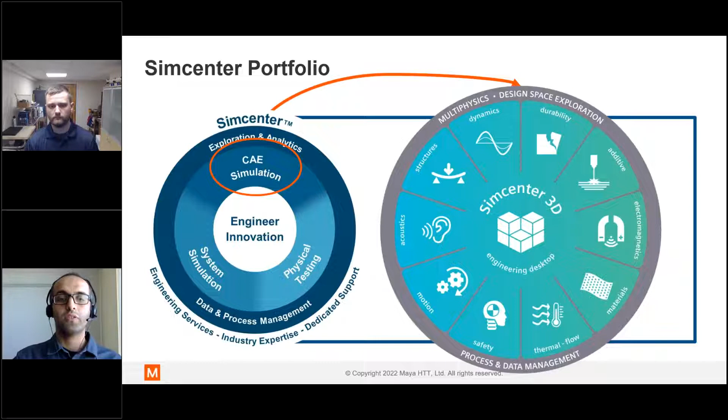Siemens has recognized us as their top North American partner in 2021. We're not just a consulting and system integrator, we also develop software with over 30 modules authored for Siemens, used by millions worldwide. In terms of the solutions we provide, obviously simulation is where we grew up, but over the years we expanded to nearly every other domain within the engineering digital space.

Whether an organization is looking to better design, simulate, manufacture, or optimize operations, we help with deployment of PLM tools, namely Teamcenter, as well as AI, IoT, and machine learning. Our combined engineering, software development, and AI expertise uniquely positions us to move our clients from concept to completion and beyond.

As I mentioned, we are resellers of Siemens tools, and today we're focusing on the Simcenter portfolio, which is the simulation center. All the simulation tools within the Siemens ecosystem are actually part of this portfolio, divided into three broad categories: CAE simulations, covering everything related to 3D simulations, system simulation or model-based system simulation, and physical testing. We do all of that as part of the Simcenter portfolio.

One key thing about Simcenter is that you can combine these different multi-physics capabilities to do multi-scale, multi-physics, multi-domain analysis. It basically allows our customers to accomplish multi-physics simulation in a cost-efficient way. Today we'll go deeper into our CAE simulation capabilities and what they can do. There are lots of tools available for different types of simulations, for dynamics, structures, acoustics — all of that is part of this platform.

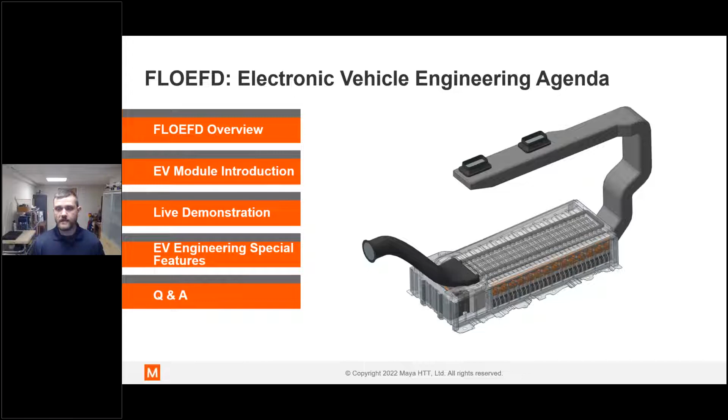Talking about Maya and what we do here at Maya - based on the first poll, you can see that we have a mix of experiences here, and also a bit of difference in methodology of where CFD is implemented in your design process.

I think importantly, what we'll see today is that FLOEFD is a tool that can be used by experienced CFD users, also by design-oriented engineers, and everybody in between, to get useful information that can help you progress your designs to fruition.

Just to mention our hands-on simulate series - this is the last of this series today. Prior to this, we did an introduction to Simcenter FLOEFD where we demoed IGBT cooling, which is certainly applicable to today's module as well, where we focus on electric vehicle systems. Likewise, the next one was on Simcenter FLOEFD for the electronic industry, where we did a detailed thermal analysis of a PCB in FLOEFD - also very applicable to electric vehicle engineering. And finally, our most recent webinar was an overview of HVAC simulation in FLOEFD.

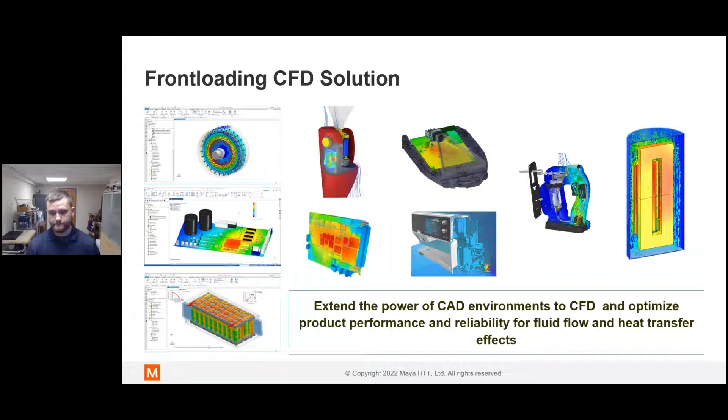So what we'll be doing today is an overview of the FLOEFD electronic vehicle engineering module. We'll do a quick introduction to FLOEFD for those who have never seen it before, or a quick review for those who have. Then we'll introduce the EV module, looking at what we'll be doing hands-on today in the demo, and then go into our live demonstration.

From there, we will go into some of the features that I may not directly look at within the demo, but are very important in the EV module. And we'll finish up with some Q&A.

So what is FLOEFD? Before we jump into our demo - FLOEFD is a front-loading, multi-CAD embedded CFD tool for designers. As I said, it's for designers, but for everyone in between as well. It's fantastic at doing quick simulations, and maybe not even quick simulations, but really design-based simulations in a CAD environment for front-loading of your design.

Front-loading is the concept of performing your simulations earlier in the design cycle to maximize the impact and catch issues before late-stage validation. There are several features that differentiate FLOEFD from other tools on the market, and this slide aims to highlight some of these key features and functionalities.

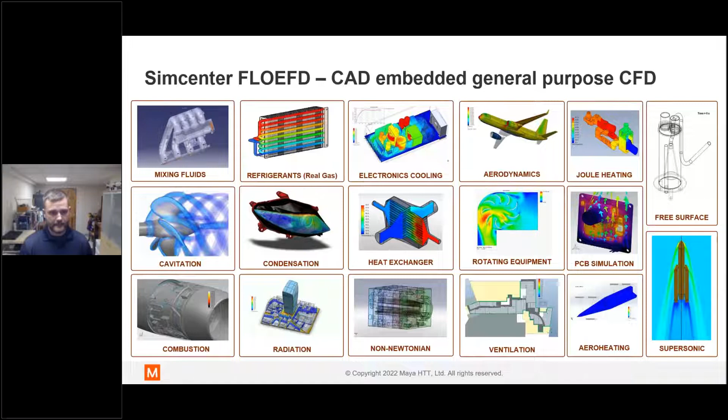FLOEFD is a general purpose tool which can be used in a wide range of flow and heat transfer problems - we'll highlight that a little bit later. There's really not a whole lot FLOEFD can't model in terms of physics, and we'll go into that in a little more detail. This is specifically developed for non-CFD specialists to get fast, accurate results.

The Mesher and Solver have unique proprietary technologies which facilitate the streamlined CAD-embedded analysis approach of this product. The result is a drastic reduction in barrier to entry and overall CFD simulation time. The tool is available in 5 versions to support your CAD workflow. Today we'll be looking at the NX version in this demo, but the process is identical for the other CAD systems.

So what does CAD embedded mean? As I mentioned, it's CAD embedded, and it's in your CAD environment. That's really the best way to put it. Your pre and post processing is directly within your CAD environment. There's a direct link between your geometry so that any changes stay up to date.

You can do direct optimization while changing the geometry. Results are shown on and in context of the CAD models. The native interface is very familiar if you've been using that CAD package for a while. And there's no need to simplify geometry or create fluid volumes in FLOEFD, and we'll take a little bit of a look at that as well later.

The major CAD systems that are available for being embedded for FLOEFD are certainly Siemens NX and Solid Edge. We also support PTC Creo as well as Dassault CATIA. If you don't have any of those, there is a FLOEFD standalone version that you can use as well. And like I said, we'll be today looking at the NX version.

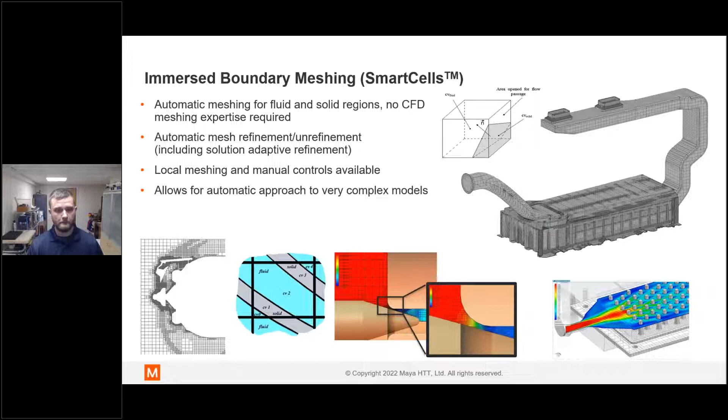As I mentioned previously, there's really not a whole lot that FLOEFD can't do in terms of physics modeling, and this is kind of the broad overview in this slide where you can see it goes from very simple to quite complex physics. So it doesn't matter if you're modeling complex physics, you can do design-based analysis early on in your design for your product or whatever the application is. Even anything from cavitation, supersonic, and even combustion is available, with everything in between, as well as electronics cooling. We'll be looking at joule heating today, things like that.

So one of the major differences between FLOEFD and a traditional CFD workflow is the immersed boundary meshing using what are known as smart cells in FLOEFD.

So typically in a normal CFD workflow, you would have your CAD geometry and you would need to extract a fluid volume. You would then need to mesh it. You'd have to put inflation layers on it if you wanted to be able to model the viscous interaction between the walls and the fluid. So then you have to worry about element quality, and if you have really small features, this can take a lot of time and really produce a very high cell count, and it can take an iterative approach to get a good model with good results.

In FLOEFD, there's no simplification or changes needed to your geometry unless you want to do them for some reason. The fluid volume is automatically extracted, and it's an immersed hexahedral mesh, which makes it very robust and efficient. And all of the refinement can be done automatically if you want it to, based on gradients within the solution.

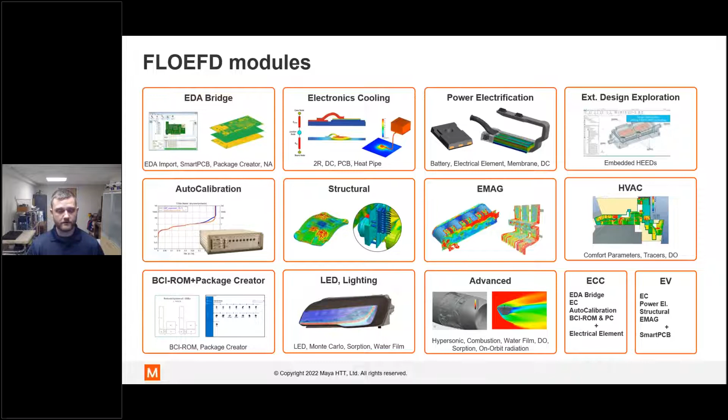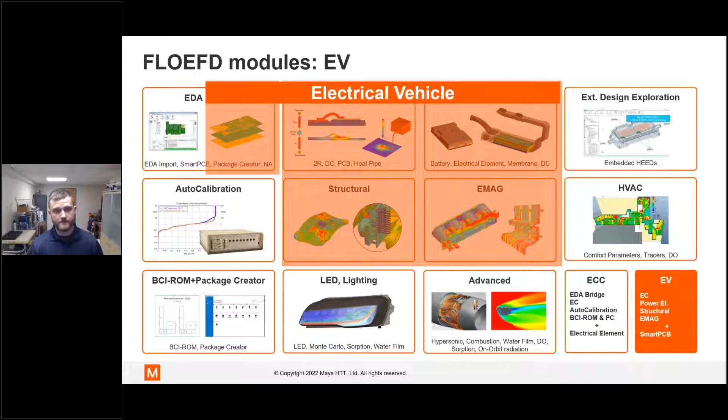Also, with that special technology, the immersed boundary meshing allows some pretty awesome things in terms of efficiency as well. As I said earlier, you don't need to fully resolve the viscous sublayer numerically with a mesh within FLOEFD. It uses wall functions, so FLOEFD can resolve a boundary layer with coarse or really no mesh layers. It can resolve conduction in models within just one cell, and also can resolve flow in channels over just a few cells. And it can also resolve geometry within one cell because it can divide the cell into subdomains.

As a result of this, the user doesn't really need to spend much time simplifying geometry. The user spends less time for meshing, maybe sometimes only half an hour, an hour. It can take that little time for very simple models, or even a lot faster than that. The mesher runs quickly because it's not trying to iteratively mesh. The solver takes less time because there are fewer cells required. And one of the great things is that because of these algorithms, the accuracy is not sacrificed. So this really can be a big jump in productivity.

So looking at FLOEFD modules and how they're applicable today, but first let's go over all these modules really quick. The new Simcenter FLOEFD module comprises various capabilities crucial for comprehensive multiphysics: thermal, electrical, magnetic, structural analysis of e-powertrain

and its components such as batteries, inverters, bus bars, DC links, power modules, and their components such as IGBTs, MOSFETs, and ECUs. These capabilities include joule heating, electromagnetics, low frequency, using EMAG, ECTM, the ECM battery model,

which we'll talk about here a little bit coming up, electrical elements, smart PCBs, so you can bring in your ECAD data and make these reduced order PCB models using resistance networks, or even modeling them explicitly if you would like.

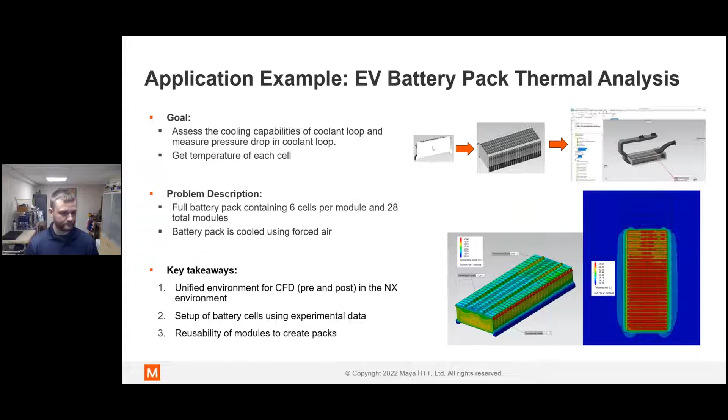Yep, and that's really one of the things we'll look at today, is you'll kind of see some of these things in our demo today as we go through in the live portion where I open up the software and work at it, is kind of how to overcome some of these challenges for yourself.

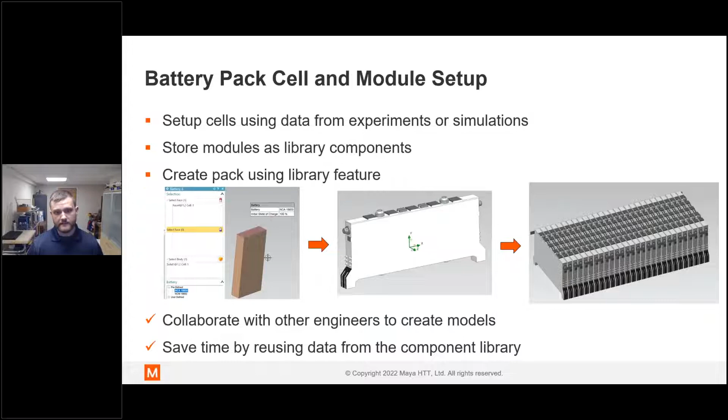Yep, so let's move on. What we'll be looking at today for an example in our demo is an EV battery pack thermal analysis. Certainly this is probably one of the greatest challenges for EVs: these really highly dense energy sources within these vehicles. And as you use them, as you remove their energy very quickly and transfer it to mechanical energy, they're going to produce heat.

So therefore, one of the big challenges here is how to keep them cool when you are discharging them as well as charging them. Because of course we want to charge these systems very quickly. People don't want to stop the EV and wait 5 hours to charge their car. They want to be able to do it like a gas pump. We're not there yet, but we're getting a lot closer.

So the goal is to assess the cooling capabilities of the coolant loop and measure the pressure drop in the coolant loop as well, because we really want to minimize that. Problem description: it's a battery pack, it contains 6 cells per module, and there are 28 total cell modules within this battery pack.

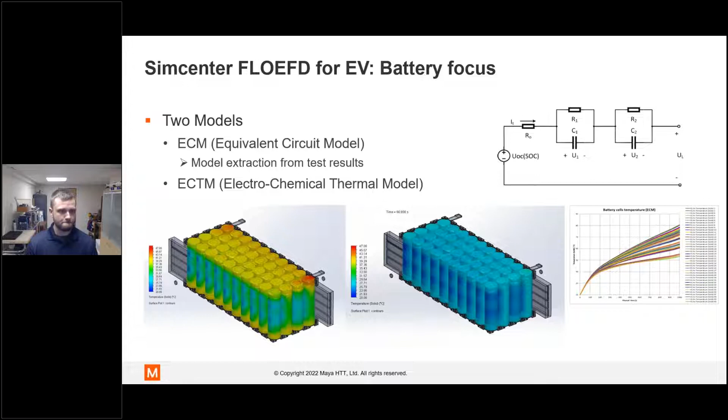Really the key takeaways here is that we're looking at this unified environment that we're describing, so the pre-post environment for CFD within NX, how to set up the battery cells using experimental data that can be extracted using testing, and also the reusability of when you're creating one of these really large assemblies is not needing to define these cells hundreds of times to create the model.

So in that regard, if we look at the battery pack cell and module setup that we'll be doing today, the setup for the cells uses data from experiments or simulations. You store these battery pack modules as a library of components, and then you can create a pack using that library feature. One of the really nice things about this is that you can collaborate with engineers to create these models collaboratively in your engineering system, and save time by reusing that data down the road.

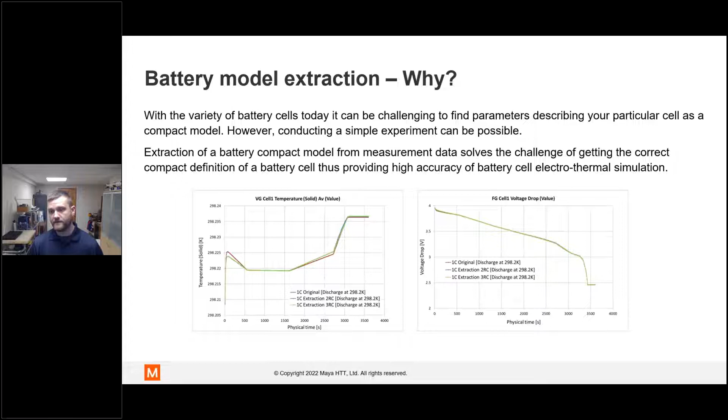Just a little bit more about batteries before we jump into it. The new battery compact model calculates the heat dissipation rate based on the electrical or electrochemical characteristics of the battery cell. The obtained heat dissipation rate is applied to the cell, and the state of charge, voltage, current, and temperature distribution are predicted. This does require a transient analysis because these are all time domain effects.

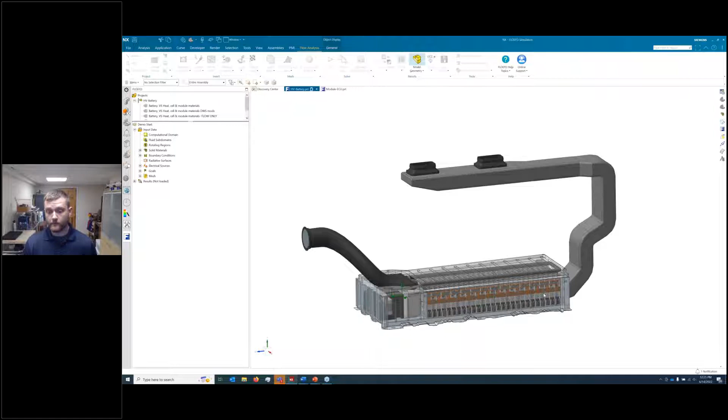Two models are supported for batteries within FloEFD. The first is the ECM model, the equivalent circuit model, in second order and third order — a much more compact and simplified model. But there's also the ECTM model, the electrochemical thermal model, which actually looks at the electrochemical behaviors of the battery cell. Both options are available. The ECM is probably better for a lot of people, especially a design-based approach where if you have battery test data and want to evaluate these things quickly, it's quite useful. But if you want to go more advanced, there is that option as well.

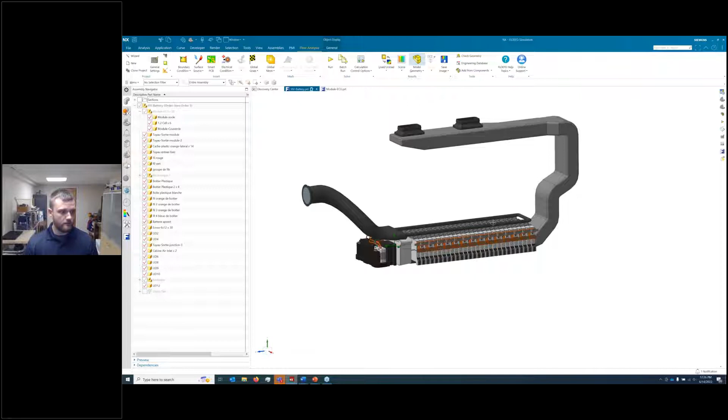So battery model extraction — how does that happen for the ECM model? The experiment consists of charging and discharging the battery in a specific manner while measuring the battery voltage and current. This is also done at a number of constant temperatures. FloEFD comes with two pre-populated models for the 18650 battery. These 18650s are very common and were used early on within the EV industry, especially in early Tesla batteries.

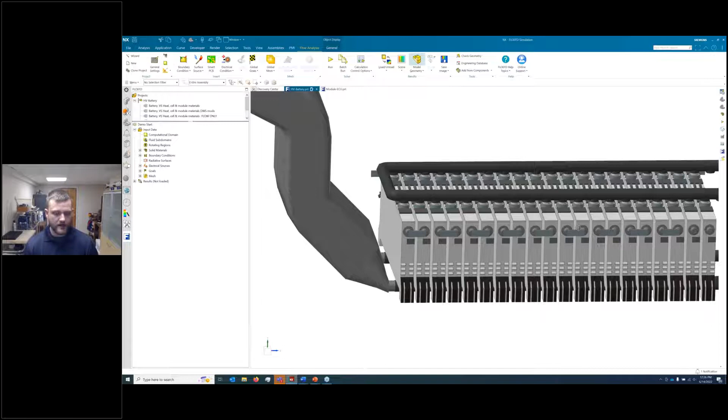So why would you want to do battery model extraction? Not every manufacturer is going to give you the information you need to do a full electrochemical simulation. There are a lot of battery cells out there, so it can be challenging to find the parameters you want and know they are correct. One of the best ways to know things are correct is through testing. So extraction of that battery compact model really ensures you have the proper behavior in your electrothermal simulation.

So we're going to go ahead now and jump into our demo. I'm just going to switch my screens here real quick, and we're going to be going into the NX environment.

All right, so we should be able to see the NX environment here now with our battery pack that is loading up a little bit. You can see what we have here is an enclosure that contains all of our 28 cells — 28 modules that each contain 6 cells.

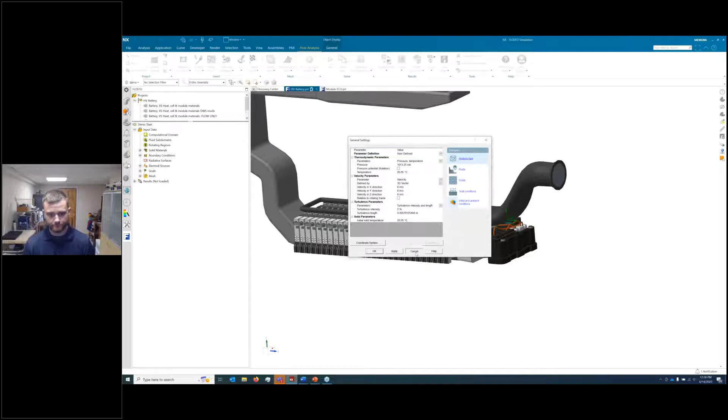From there, I'm going to hide our enclosure here. You can see that we have an inlet where air flows in, which then flows down into this manifold and feeds each module with cold airflow. That cold airflow goes through the battery pack and comes out the top here, and is then discharged out of the vehicle.

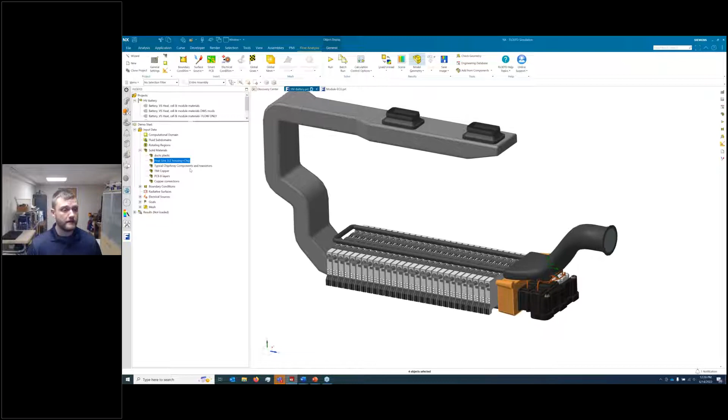So that's what we'll be simulating today. We'll be doing this in the time domain, as I said, and looking at the behavior of this battery pack over time. So before we jump into the nitty gritty here, I did do an overview of this.

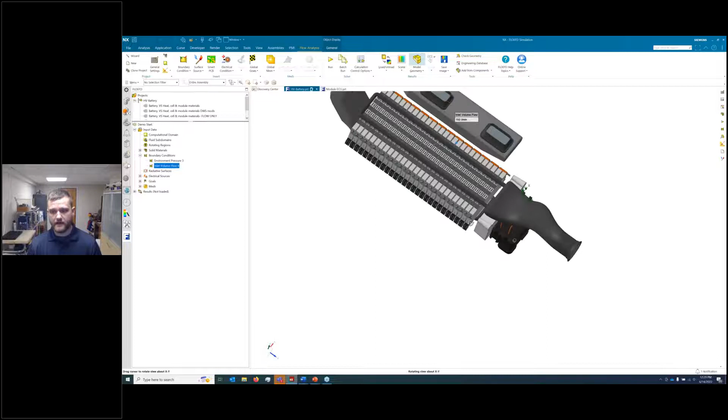You can also see in here one of the important things we'll be looking at is our contacts for each one of these modules. So we have contacts where these batteries are in series to develop around 125 volts at a full charge. One of the first things we really want to show is that modularity.

But even before then, let's just take a quick look at our general settings, and what we would do if we were setting this analysis up from scratch. The first thing we would do is go into our general settings. Today we'll be looking at fluid flow, solid conduction, and we will be including radiation in this analysis. We'll be doing discrete transfer, though there are other models, including Monte Carlo. We do have some rotation in this flow, and this will be a time-dependent analysis.

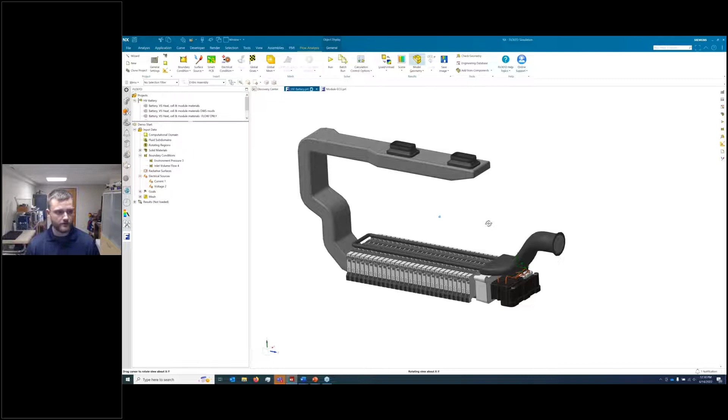The only fluid we're looking at today is air. We're not including humidity, but that could be done as well. Our default solid material is the plastic components. One of the big things within FloEFD is that there is a material hierarchy, so even if you do have overlapping geometry, FloEFD can deal with that fine by saying this material takes first priority, this material takes second priority, and if there are intersections, it will automatically deal with that.

We can do wall conditions as well, default wall conditions. In this case, that'll just be default smooth wall conditions. And certainly we want to set our initial conditions for the analysis. Today it's ambient temperature, ambient pressure, so 20 degrees C, zero velocity. We're not doing anything crazy with our turbulence parameters, and our solid parameter temperature is also at environmental conditions. So this is one of the first things we would set up if we're starting this analysis from scratch.

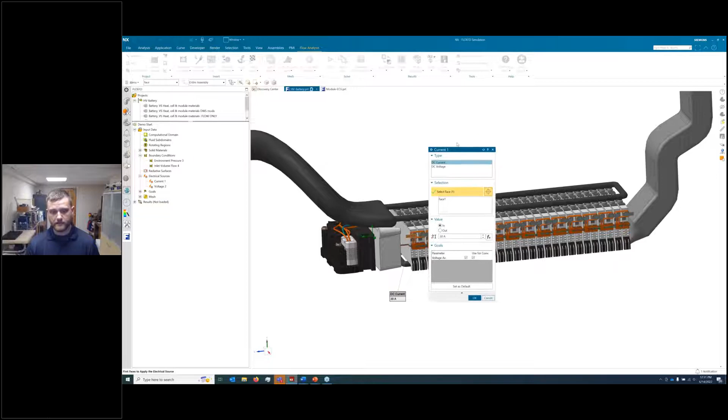The other things we have here as our basic boundary conditions, or excuse me, our solid materials first, is we have our plastic components. This does have a heat sink in this model that's not activated today, so we won't be taking a look at that, but that can all be combined. This includes that chip array that's within there. We do have our thermal interface, copper, and a PCB in there as well. And then our copper connections, which is a big one we'll be looking at today, all these copper connections that are connecting the individual modules.

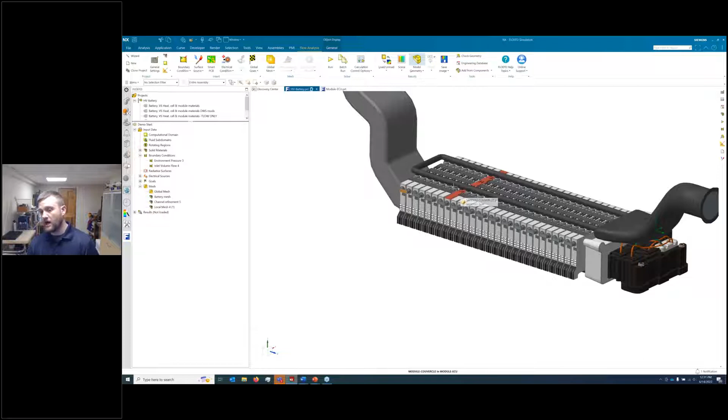For our boundary conditions, we have just very simple environmental pressure on the outlet here, but then we also have inlet volume flow rate at room temperature, which is 150 liters per minute. That'll be constant, won't be changed through the time domain. The thing that'll be changing will be the temperature and voltage in the cells and the charge level in the cells. We're not setting up any particular radiative surfaces, but radiation is activated here, though we're not doing any specific emissivity or absorption parameters on any of these materials.

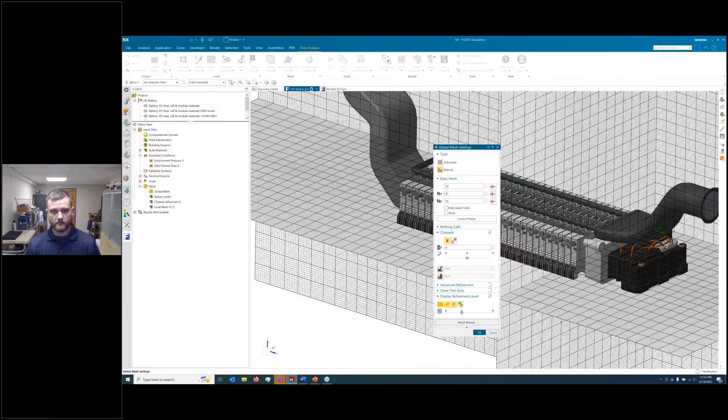The other big thing here is we need to define the contacts and where the ground, the zero voltage location, as well as the current for this analysis, for the electrothermal simulation. So at the first, the positive, final positive connection of the module here, we have a current of 30 amps, and that will remain constant. You can make these transient values as well. If we just open that up, I'll show that real quick. You can see that we have a constant 30 amps here, but we can define that as a function.

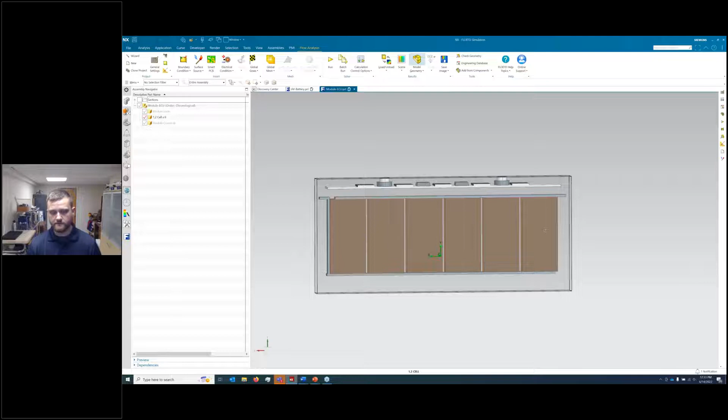More importantly though, too, we can see that this is a charge cycle and not a discharge cycle, so we could do a discharge cycle as well, and you can say in or out. We can make it a function, and we have some goals defined here, and that's a big thing in FloEFD, is we're not really too worried about monitoring numerical residuals in the solution. FloEFD is monitoring that for us, but we are monitoring our values that are important. So we want to make sure that the values, if we were doing a steady state analysis, would converge to a constant value. In this case, they're changing, and FloEFD is automatically selecting the time step as well.

So we have that, and then we have a zero potential location here set at 0 volts.

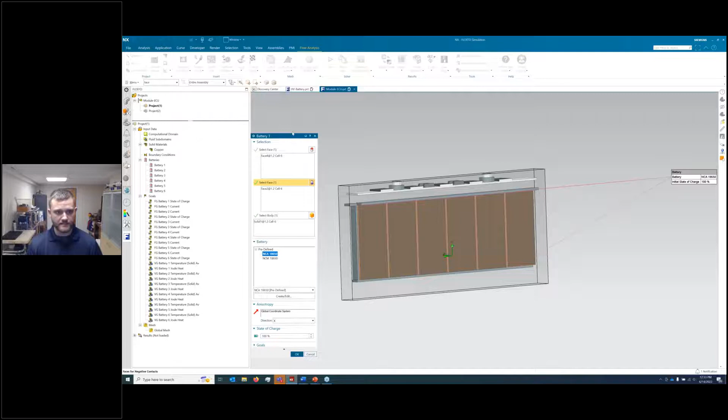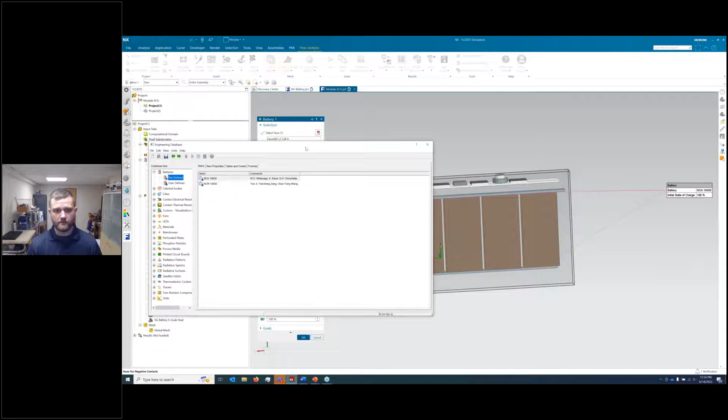As I mentioned, we have our goals. We have some global goals here that are set for the entire simulation. And then we also have our mesh, and we can just take a quick look at our global mesh. We also have some local meshes here. This is a fairly big problem, so we did want to define some local mesh locations, and these can be done in a variety of ways. You can do it in a box or a sphere, or apply it to a body. Those are areas that are very helpful to refine certain locations, channels as well.

But just looking at our global mesh, we'll take a quick look at those parameters. In this case, we're using a little bit of a manual mesh where we have an initial mesh — the dark or thick outline squares are the initial mesh size — and then the smaller squares are for the refinements based on different parameters.

Just a quick bit about that. If you want to know a bit more, we'll go into a little more detail in meshing. I highly recommend some of our previous FLOEFD videos.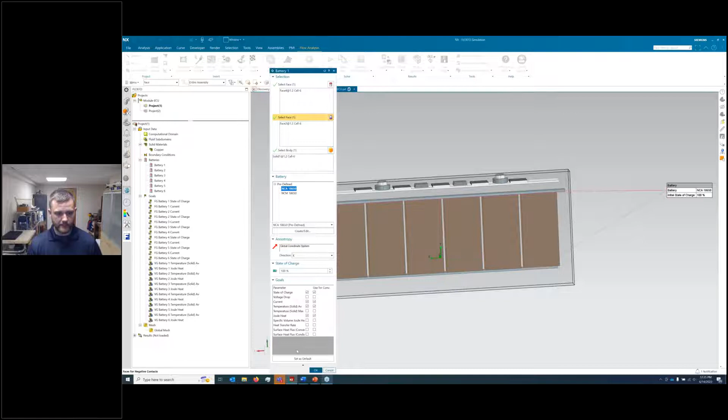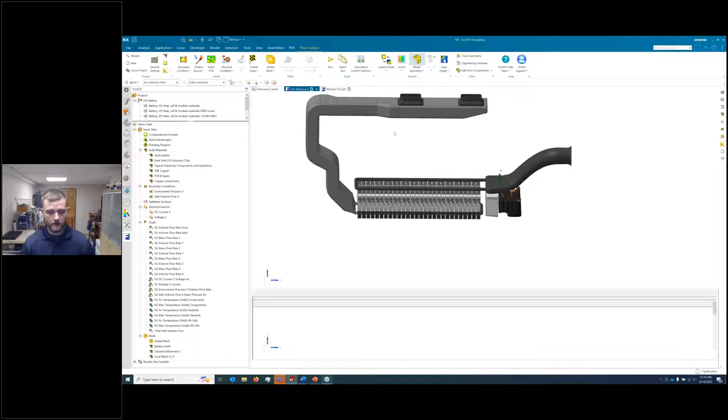One of the big things I mentioned is the modularity of this analysis. As you can see here, we don't have any batteries or cells defined yet. However, we have defined a cell or module in a separate project. I'll show my cells and hide that case. You can see our conductors on these cells, but these are each one of our cells for this analysis. So we don't have to define these hundreds of times to do this.

We have to define it 6 times in one module, so we have battery 1 through 6 here. We also have 2 projects because we're reversing the polarity in these cells, alternating in the packs to develop the voltage. That's just the reason we have 2 different ones here.

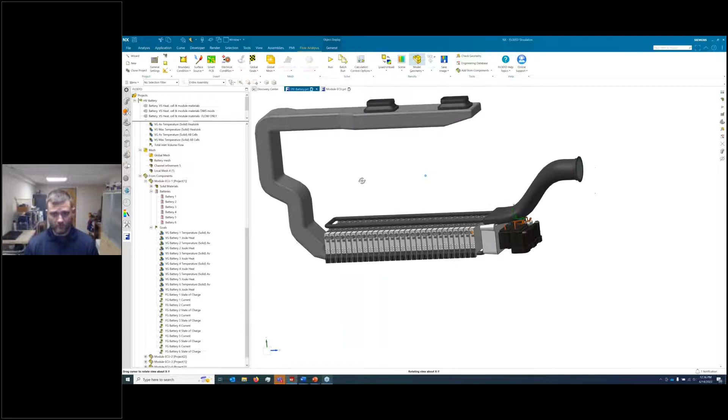So about this first battery, we'll just take a look at the edit definition. We're selecting our positive terminal or positive location, as well as our negative location. We're looking at our battery models here, and this time we're using a predefined 18650 model, which has a specific anode and cathode chemistry. I can show you a little bit of the details here, which are important, where these would be in a library, and you can create your own user-defined ones. In this case, we have this NCA 18650.

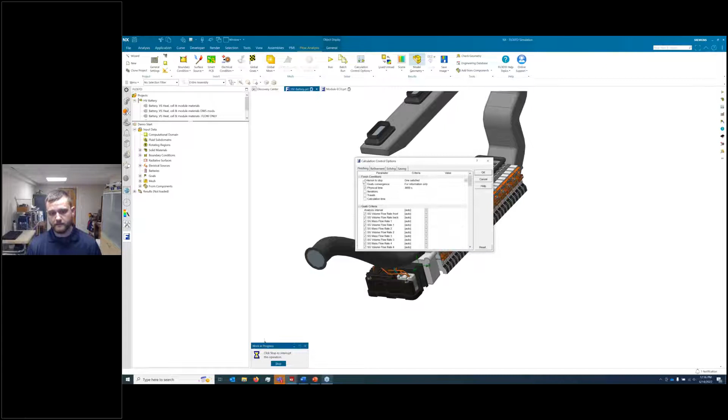We have our item properties, and these R values and C values are all done using a table. Then there's the open circuit formula, which uses those tables for the final model. We can see those curves here for all of those, looking at different temperatures and different states of charge, etc. So that's really our big one. We can see the formula here for the entire mathematical model for the battery. We'll just close that up, but that's the model we use here.

If there is any type of orthotropic properties to the thermal resistance, that can be defined as well. You just need to make sure you set the direction correctly. You can see here that we're doing 100% state of charge.

And we're looking at our goals here. We have a whole set of goals for this entire module as well, so these will be repeated once we set it up. So this is all set, we're gonna close that up.

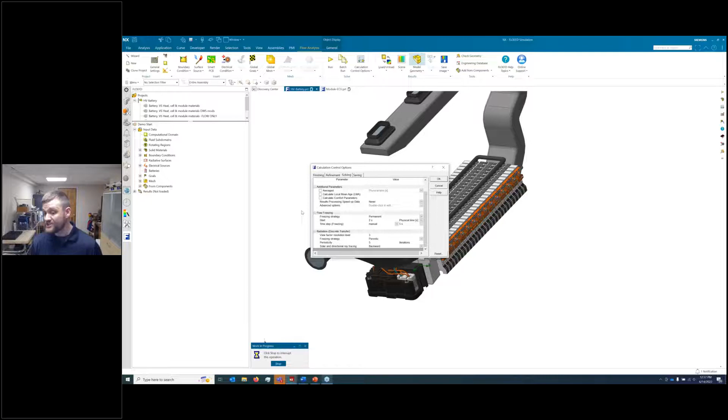Now, though, we have all of these models populated here in our CAD environment, but we want to apply that module CFD model here as well. The way we do that is we go up to add from components, and it's already recognized all these models. We have our 28 modules.

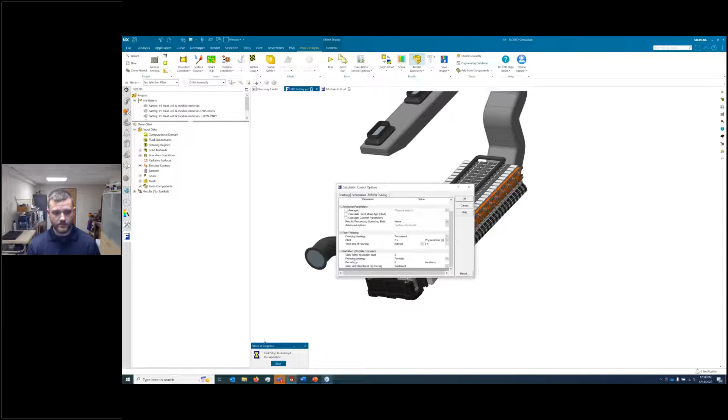For the first one, we would just alternate - the first one we do project 1, second one... I'm not going to do all of these. We do project 2, then we'd alternate project 1, then finally again project 2, and so on until we had all of our modules complete. But I'll add these first 4 so you can see them. We hit the add button and import it - it gives me a nice green check mark that it all went well.

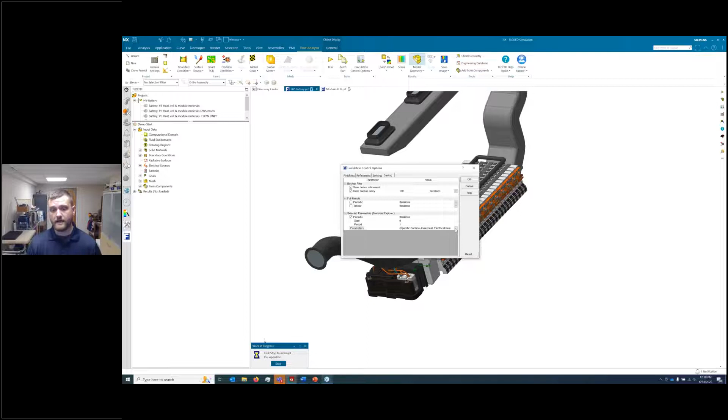You can see we have a from components list here now, with ECU 1, 2, 3, and 4. Each one of these has their own set of batteries, its own set of solid materials as well, and that's all automatically imported.

So this is all of our setup for this project. We don't have to do anything else here in terms of defining the problem setup, other than our calculation control options. In this case, if you were to run this thing all the way out, we've set a physical time for this to complete at 3,600 seconds.

You can also do iterations - you can set what goals you want converged. If it's transient, you've got to be careful about that, because obviously not all goals are going to go to a steady state for a transient analysis, so you have to be careful about that. We could define automatic refinement if we wanted it in a solution - that's not part of this, but that is where that would be. For solving, you can do automatic time steps or manual time steps.

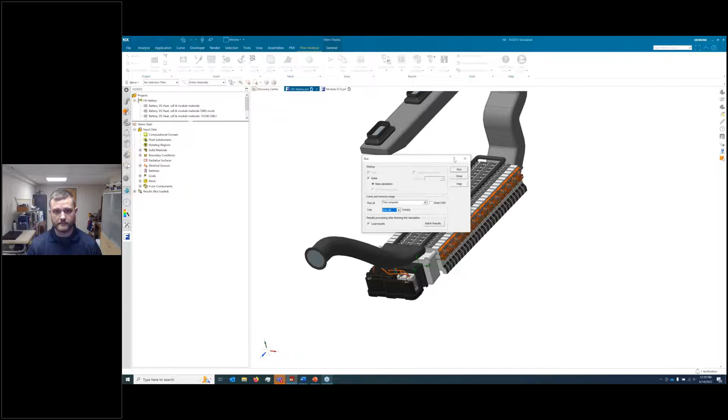In this case, once the solution got going up beyond an initial transient, we stepped up the time step to 0.01 seconds. You can do nested iterations if you would like, if your numerical scheme requires that or is beneficial.

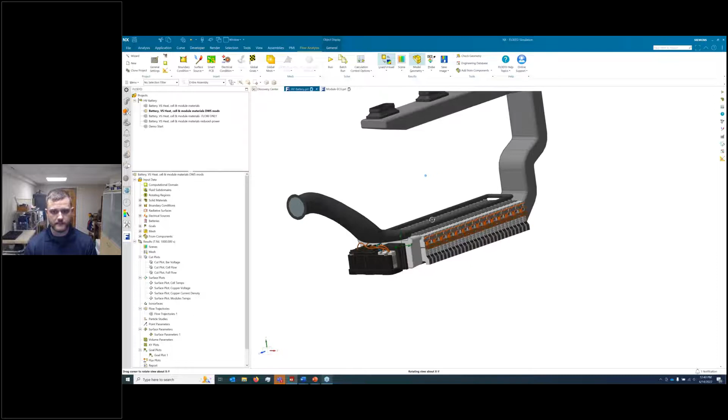Flow freezing is another thing that can be done within FloEFD to speed up a solution. It's used in this analysis where FloEFD will detect areas in the domain where things have reached a steady state and will stop calculating that zone for a period of time. You can do it permanently or periodically, and that dramatically helps speed up the solution, so it's only looking at the transient areas of the domain for each iterative calculation.

And obviously here we have our discrete transfer radiation parameters. One of the things that's cool here, I'll mention before we go into the results, is that you don't have to save full results for a transient simulation.

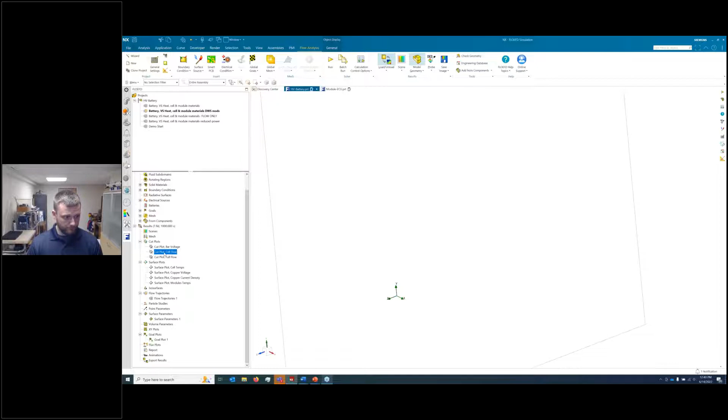You can do this thing called a transient explorer within FloEFD. You can say, I only want to save specific results, and I want to save it at this number of periodic iterations. But more importantly, you can say I don't need all of the results to be saved for each time step, I can choose what is important. Because if you were to save all of it, it takes an enormous amount of data, especially for a large model. In this case, we're just looking at the flow parameters, mainly heat transfer, radiation, and Joule heating, which is really what we care about for our transient analysis. So that's all we're going to include.

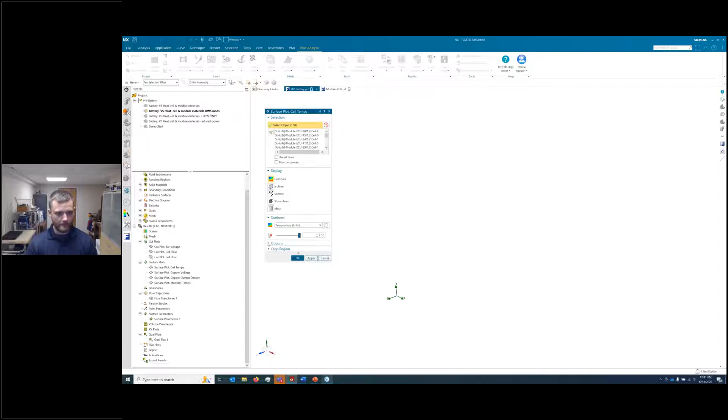And this is where we would run our simulation. If we're going to run this, we open it up, and it would need to mesh because I haven't run the full mesh yet on this demo portion. But you can run it on a cluster if you have it. There's no core limit on FloEFD, and there's no additional license needed to get more cores, so you can choose as many as you have available.

And we would run it, and then it would go into its solver environment. If you want to see more of that, look at some of our previous webinars where we take a look at how the solver looks as it's progressing. But today we want to spend more time on post-processing, so we'll skip that today.

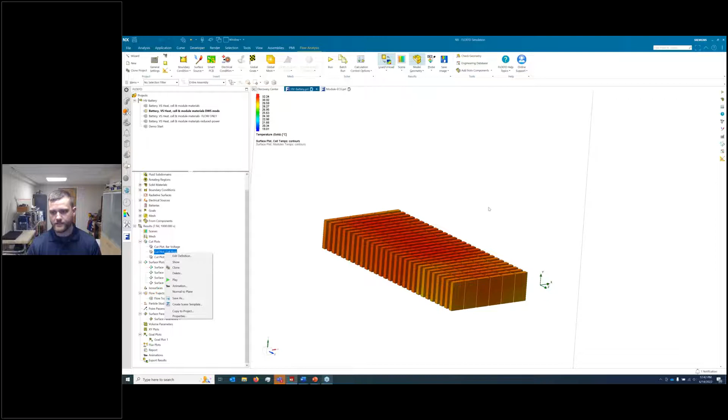Assuming this is done, we would go to our completed solution and open this up, load up our results. We have our goals, and we'll go down to our post-processing here. As we mentioned, we really want to look at how hot these batteries are getting, because temperature is really one of the major limiting factors in longevity and in preventing catastrophic issues with battery assemblies. So that's what we're looking at.

In terms of this run, we just ran it out to 1,000 seconds, and we can see first, let's take a look at the cells. I'm going to hide all my geometry, because FloEFD will show these results right on the geometry, and we'll look at our cell temps. I have a surface plot here which is set up for looking at variables on surfaces. In this case, we'll look at the solid temperature, and it's going to open that up for us. There's quite a few cells in there, so it's going to jump through those real quick to bring them up, but still not too long, just a minute here.

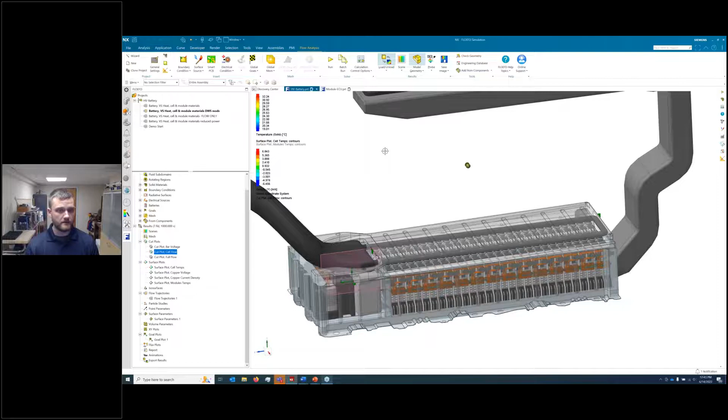I'm just going to be looking at contours, but we could be looking at isolines. If this were flow or flux, we could be looking at vectors, and we could also include streamlines. We can even look at the mesh resolution on these surface plots as well. In this case, we need to change our scale, and we can see the temperature distribution of all of our cells within this assembly.

What we'll notice right away is that two-thirds of this cell pack is quite hotter than the other. Maybe we want to investigate why that is, so we can go from there and say, okay, why is that part of this pack getting cooled more than this zone? That's something we would want to investigate.

Looking at that, we could look at the flow in a cross-sectional view, if I just bring this back up, of what the flow looks like at the inlet and outlet of these manifolds. So let's do that and show that. This is a cut plot.

In a section view, we'll be looking at the velocity of the flow going in and out of these modules. And it's a big model, so it does take a few minutes to open up.

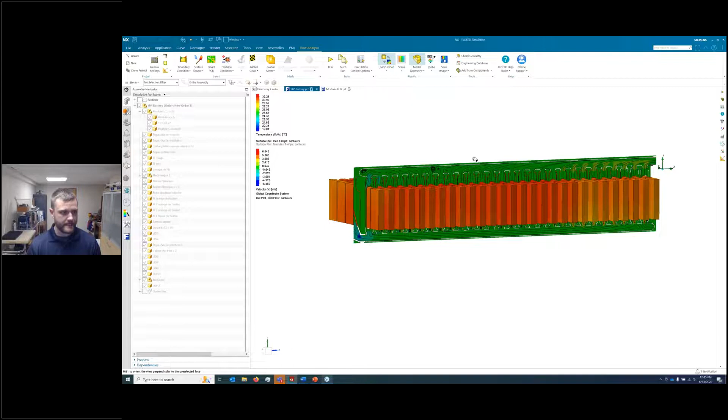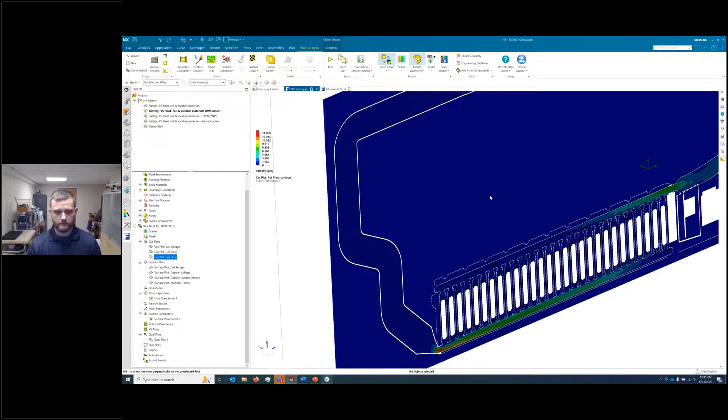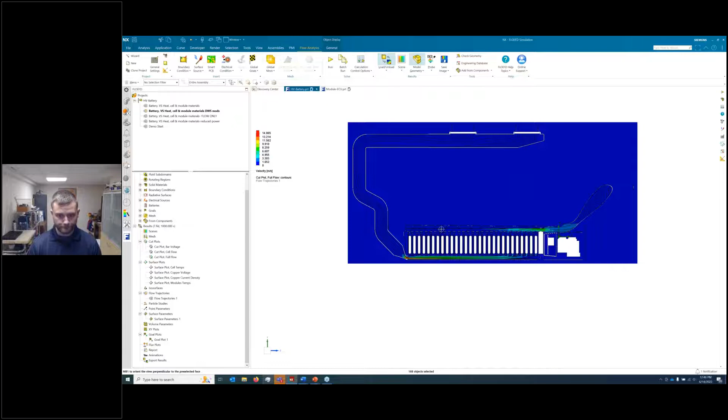One thing I should mention, if you've watched any of the other webinars, is that this is certainly the most complex model we've shown. This probably is on the limit of what you'd call front-loading CFD. But just because this is a complex model doesn't mean it's not front-loading. Front-loading still implies that you're doing this in a CAD environment where you can make changes, where it's easy to set up the solution. This solution did take significant time to run, but it didn't take a ton of time to set up. You don't have to invest a lot of man hours into these solutions to get results. Someone can set these up pretty quickly, then let it run and get results. That's really the big takeaway here.

So I'm going to hide that geometry again, but you can see this is cutting through that flow manifold. We'll look at that normal too. We have flow coming in from the negative Z direction and the positive Z direction, then going out the top in the same direction. This is flow in the Y direction, so vertical flow.

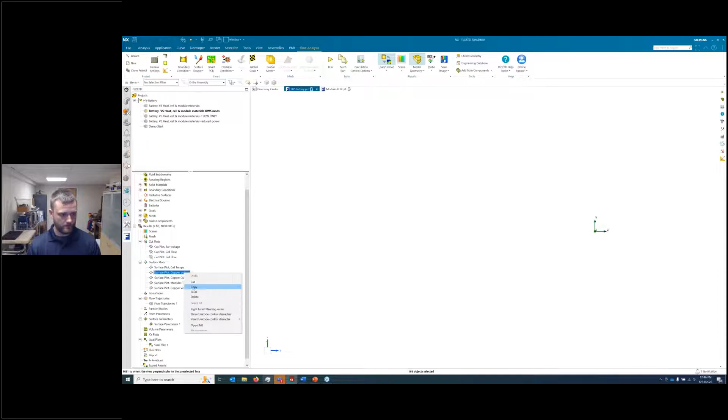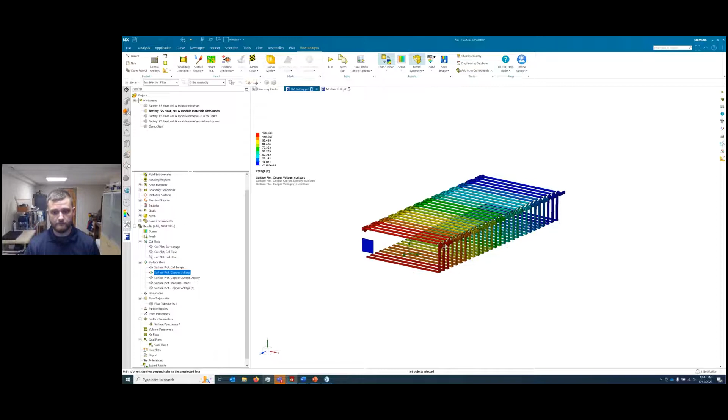What you'll see immediately here is we're getting a lot more higher velocities down at the end of the battery pack that's being cooled more. Likely the reason for that is we're getting a larger static pressure recovery, as higher velocity flow comes in, the static pressure is recovered, and that's why you're getting more flow through this zone. So you might think, okay, maybe we need to make these tubes larger in diameter to slow that velocity down, so you're not getting such a large change in static pressure at the end, and rerun this analysis.

That's the thing that can be done really easily, is to go into the CAD and make the change. You don't have to change mesh parameters and lose all your mesh. It'll automatically remesh it, as long as geometry hasn't been deleted, and especially if something's been parameterized, it'll automatically do it. So that's an important takeaway here.

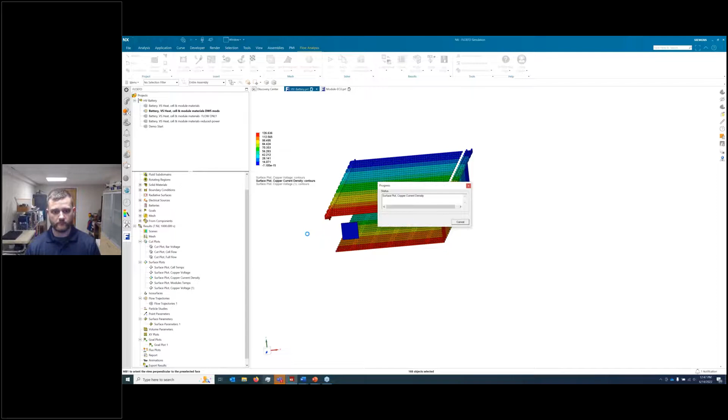We'll go back to our results and look at some of the electrical outputs. We'll hide our cell temps, and maybe look at the full flow in the entire domain first. This is what I should have shown earlier - this does have natural convection coupled with it too. It's not just an internal flow, this is an internal and external flow simulation. So this entire battery pack assembly is being cooled by the ambient environment as well as these surfaces heating up.

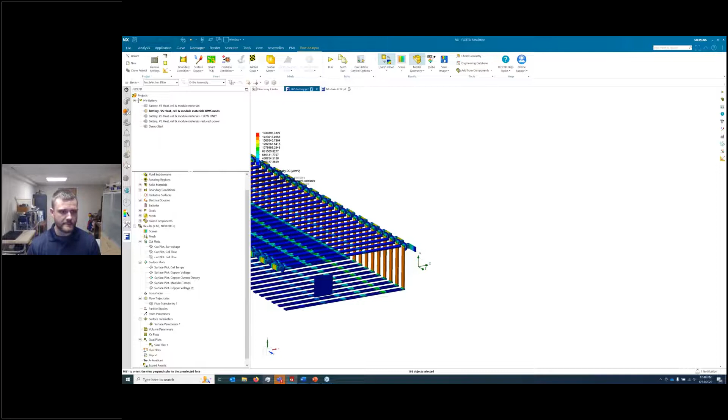But let's look at some of the electrical properties. We want to look at the voltage on the copper connections. We can do that here. As you can see, we have essentially 0 voltage down at our boundary condition for a 0 potential. Then we have the voltage calculated from the battery model and the current down here at this location, which is 126 volts. So we can see that.

Maybe we also want to look at the copper current density, and really make sure that we're not overworking any of this material for current.

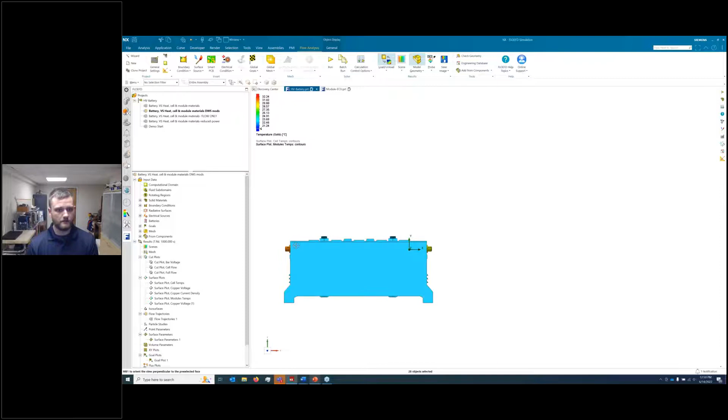So one of the nice things about FloEFD is that once you create one of these plots, you don't have to go in and re-edit the definition to change the variable. You can just use this drop down, which is really nice, and we'll just look at electric current density here.

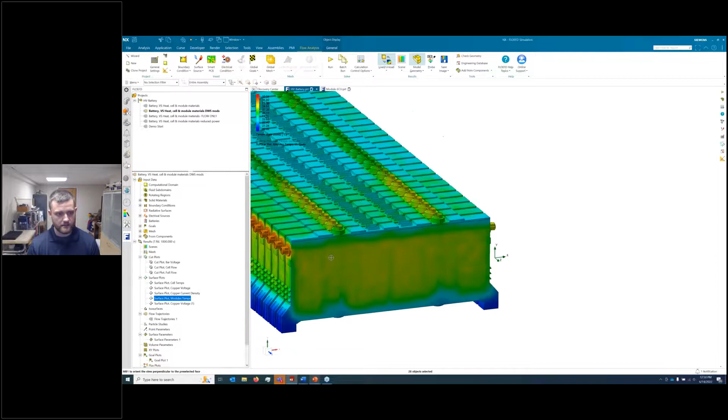We can see certainly our peak density is in these crossover connections here, where these are all taking the 30 amps of current. So that's going to be where some of the really high locations are, as well as some of these changes here. So we can look at that. As I said, it's really easy to change these.

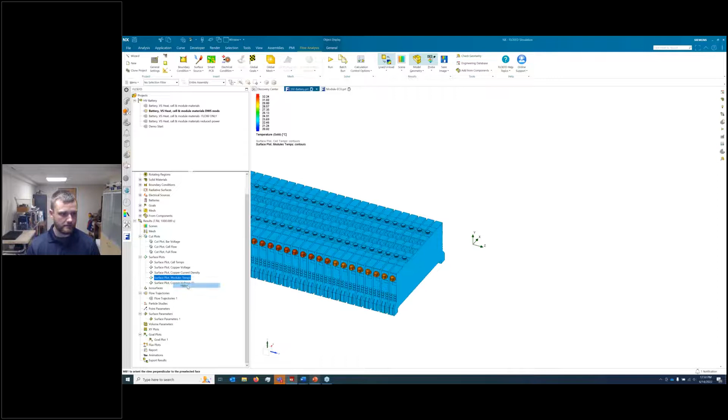Maybe the last thing we want to look at is the module temps, so the casings of those modules and what temperatures those are reaching. And so we'll go ahead and show those. That could be rather important, making sure we're not hitting the limits of our casing material. It would obviously be very important to not have any type of escape of our cooling flow. And if we were looking at the cell temperatures, we obviously want to make sure that we're not compromising the battery casing as well. This is just taking a second to open.

I'm just going to keep an eye on the time here, because there's a few more things that I want to show in our slideshow, as well as some of the results here.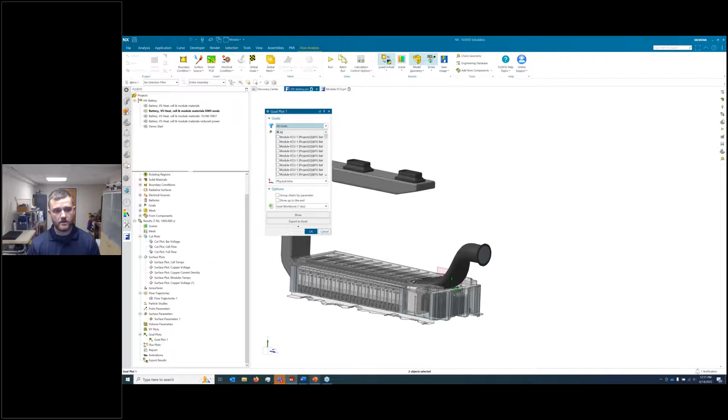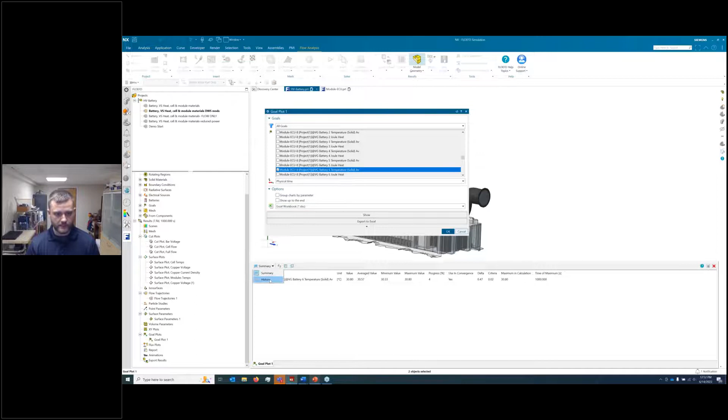And there we go, it's just a really big plot. We may have to edit some of our contours here. But we want to look at the entire domain here of these battery casings. It's just a little slow for me right now. We'll change the range on these. It is a little slow because this is a big plot. I may actually have to, let's see, clear and hide, and just show again. Sometimes that speeds it up and takes care of things.

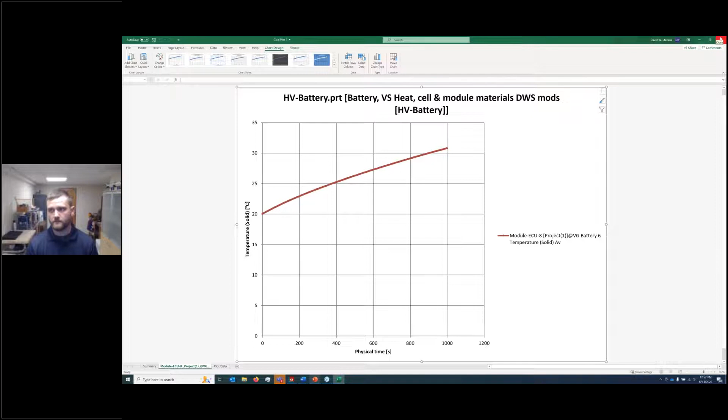Yeah, there we go. So you can see the temperature of all of the casings here. Really nice resolution. You can see the imprint of the cells' heat coming out here in the sides of the casings. And really our highest temperature locations are at these contacts. We've got some joule heating going on here. But overall, not too bad.

We can also probe if we want and really look at detailed locations. And we can see that's 31 C down there. Just speeding it up here a little bit because we want to be able to see the rest of this stuff, so I'll hide this.

Flow trajectories, really easy to do. This one's kind of coarse. Maybe we want to make sure we don't have any nasty eddies in a certain location. And it looks like we're getting a little bit of an eddy here at this outlet, and maybe we want to correct that.

Jumping along here, surface parameters. We wanted to see the static pressure at the outlet for this assembly. That was one thing we wanted to calculate, and really there's not a whole lot of pressure drop for this at this flow anyway. And lastly, let's look at our goal plots.

These are very important to see, especially if we want to look at individual battery packs within this. We can look at our goals and how they change through the transient solution. I'm just going to hide all these, but let's say we want to look at these, which are all state of charge. Current is going to be constant. Let's look at this solid temperature here.

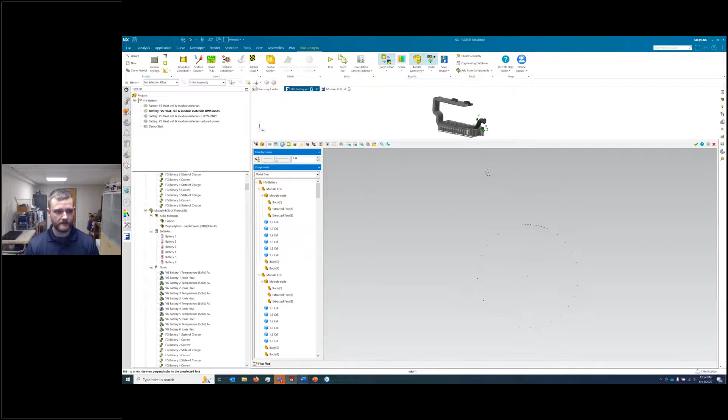Let's just say we want to look at this and show that really quick. It's going to show a summary first for the maximum value over time, minimum value over time, but we also maybe want to see a history, and we can see that that's not quite linear increasing, but increasing over time, which is what we would expect to see.

So you can plot these as a function of time. You can export them into Excel in a matter of seconds, and it gives you the nice chart as well as a plot, and you can export these all at once if you want, which is extremely useful.

We'll hide that. One of the last things I want to show, and this is kind of a new powerful feature within FloEFD, is something called flux plots. And for any type of electronics heat transfer, where you have a bunch of components, this is really useful.

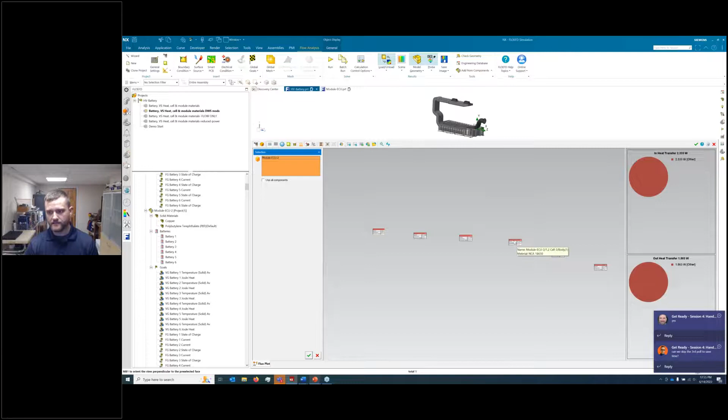So in this case, we'll use all components, but basically it's going to give us a nice flow chart of where all of our thermal energy is going and how much of it is going to each component. Let's get that coming up, it's just going to take a second to load.

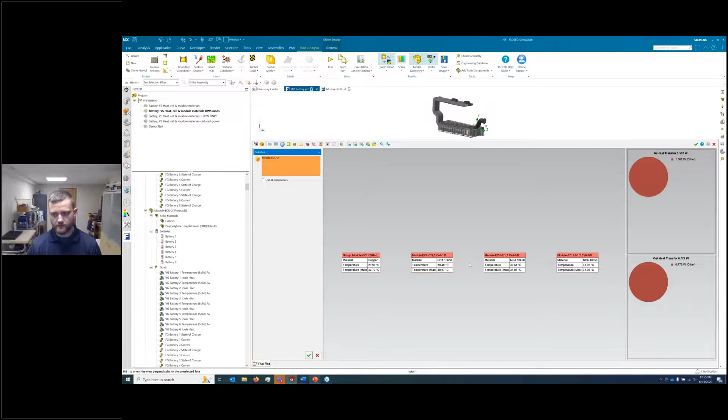This is going to start out being quite large, so maybe I actually want to just go down to one component, that's probably a better idea to start with, because this has a lot of components. You can go that fine if you really want to. Of course, it doesn't like that I did that, it's going to want to calculate all of those components, which it can do, it just might take a minute.

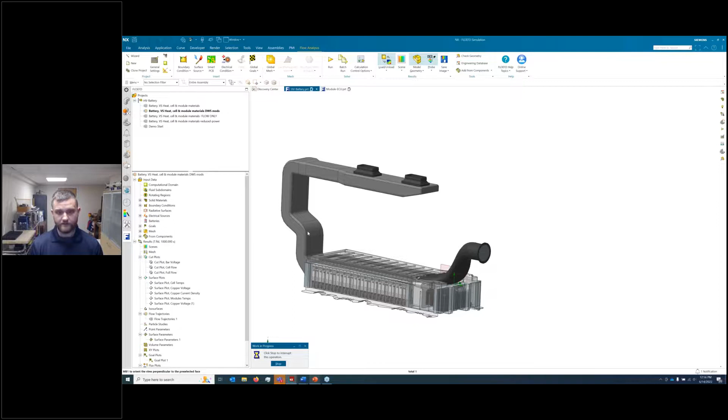All right, here we go. So let's grab one of these cells and look at one of those. All right, this will be much more manageable. Trying to look at this all in the context of itself would be probably a little bit much for what you would want to use this type of tool for. You kind of wouldn't be able to see the forest through the trees, so to speak.

We can filter things out by size, and maybe I can get this to redraw. Here we go. So it's going to give me a flow chart here. So it calculates... I'm going to resize this, but it's going to give a flow chart.

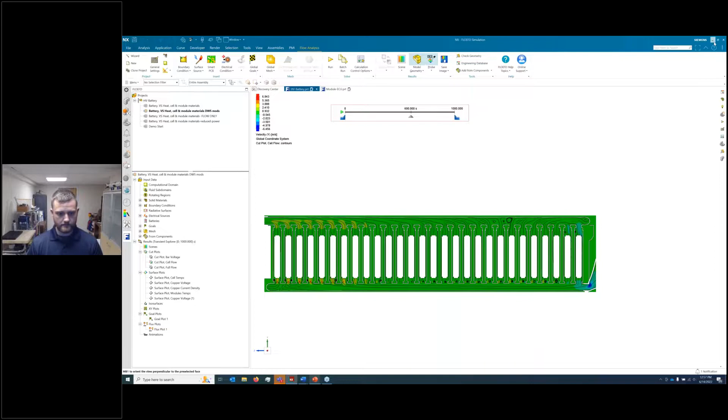I can change this to include certain elements and do that. It can also include boundary conditions, whether it's thermal effects or Joule heating, and these can all be included in the flux plot. I can select certain locations within here, and there we go. Resize this, and I can see all of these different ones.

So if I'm looking at each cell which is included in here, I can see that, and I can see the temperature of each cell, what it is at the current time, what it is at a maximum time, etc. But I won't dive into too much more of this. You can see there's vectors going from where the heat is coming from, etc. So we'll go ahead and close that up, don't want to take too much more time.

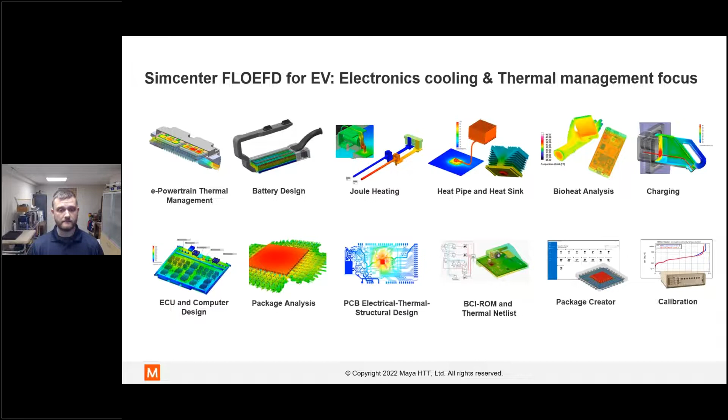Just the last thing I do want to show, which is really powerful within FloEFD, and this can be kind of tough to do within some other tools, is something called the Transient Explorer. As I mentioned, you don't have to save all of your data at every time step, and likewise it's really easy to produce transient plots within FloEFD and animations.

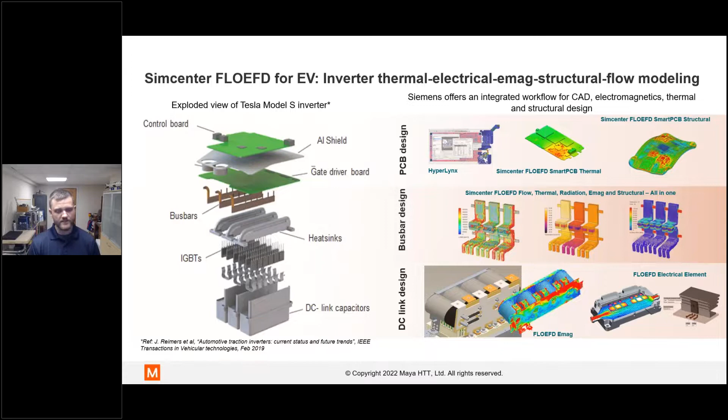So I already have these plots produced, but when I open up the Transient Explorer, it loads up all of that information. Just a perfect example here, I'm going to hide this so it's easy to see, and then open up this transient plot, and let's look at that in the cell where I cut things down a little bit, and we can create a really nice time domain animation with this.

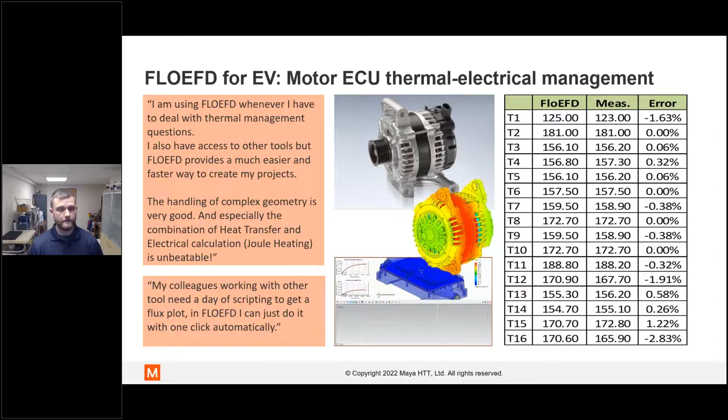Oh, we got to change that. And we can see how this all changes over time. This reaches steady state pretty quickly, but you can see some small changes in here. It's nice to be able to make these transient plots. I can export this as an animation really quickly, and it's very efficient. So not needing to load up all of that data for each time step to create an animation is really powerful.

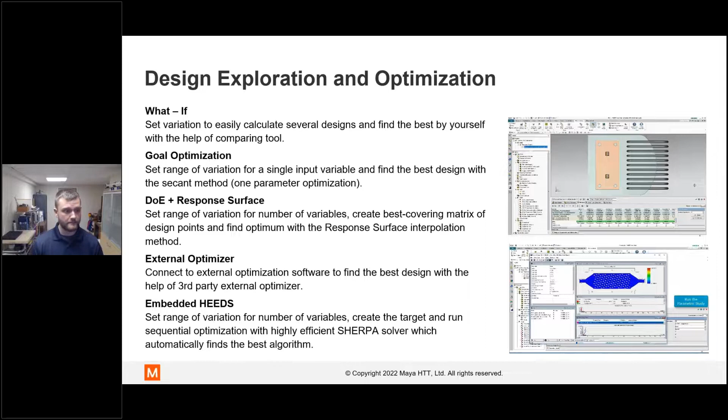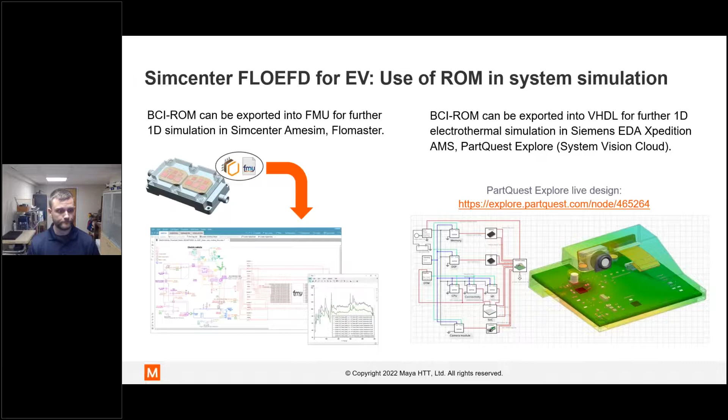Just want to mention some of the things available in here that I didn't cover directly. Certainly e-powertrain thermal management, charging is something else we could model. You do have the ability to even model IC packages directly within FloEFD using the package creator, and that can even create really explicit models for those packages if you're worried about IC temps and very fine details in IC temps.

Moving on to the next, there is a plugin for electromagnetics, which is extremely important for EVs, as well as, I mentioned earlier, the thermal structural analysis is available.

One of the great things I want to mention is that EVs are a perfect example of the requirements for multi-physics simulation. If we're looking at this Tesla Model S inverter, you have everything going on here. You have IGBTs, bus bars where you need to maybe look at an EMAG analysis, DC link capacitors. So you have thermal, electromagnetics, flow. It all needs to be cooled, and it's all in one coupled package. It really matters everything that's going on, and of course PCBs in there as well.

This is an example from a customer that was designing an electric motor. This shows their data, their FloEFD results, first their measured results, and as you can see, they came out very nicely.